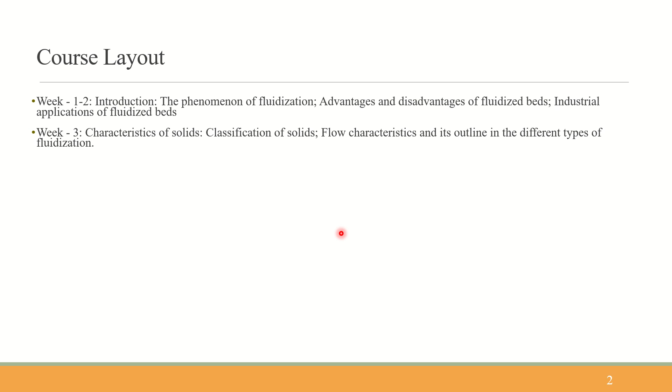Here we have week 1 to 2. In week 1 to 2, we'll be covering the introduction to fluidization phenomena, the advantages and disadvantages of fluidized beds, and industrial applications of fluidized beds. In week 3, it is about characteristics of solids, classification of solids, flow characteristics, and its outline in different types of fluidization. Weeks 4 to 5 cover flow patterns of fluidization systems and flow pattern transition.

Flow pattern transition, flow pattern map - because in fluidized beds the most important thing is solids, and we need to identify the characteristics of the solids. We need to know in which regime of fluidization it would be, and what properties that particular solid has, so it would be easy for us to analyze movement, mixing, and segregation. The classification of solids helps us analyze the situation happening inside the bed and understand what mechanism or type of things would be happening inside the fluidized bed, since mixing and segregation are all there.

In week 6, we would be studying gas distribution and different types of gas distributors. Week 7 would be bubbling fluidized beds. As we go along, you will see there are different types of fluidization regimes classified based on the inlet fluid velocity. Week 8 would be entrainment and elutriation from fluidized beds, week 9 is attrition mechanism, weeks 10 to 11 cover mass transfer phenomena including particle-to-gas mass transfer, and at the end we'll deal with heat transfer phenomena.

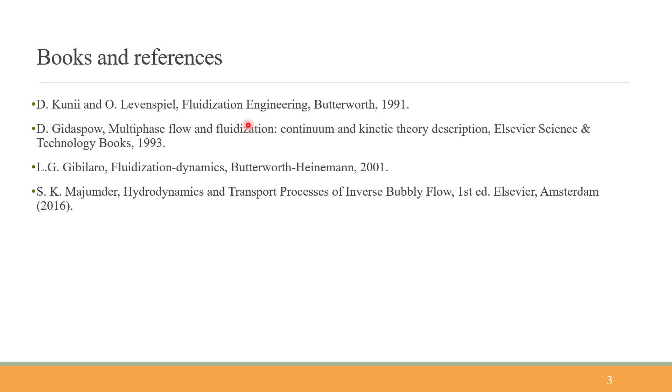Moving on, we'll go with this week's problem. But before that, I want you all to know what fluidized beds are. By now, you would have seen the lectures and be familiar with the concept. But can anyone explain what fluidized beds are? Even though you might already know, if anyone answers I would be happy. Maybe one person can answer. Okay, if not, I myself will explain.

Fluidized beds are nothing but a device, or equipment, wherein some means of separation or mechanical operation occurs. Not just mechanical, you can do unit operations and unit processes as well. So here we have a fluidized bed, which starts as a packed bed. By packed bed, we mean a column filled with particles. Consider we are passing air from the bottom of the bed, and the bed particles don't move at all. Can you imagine what I'm trying to say?

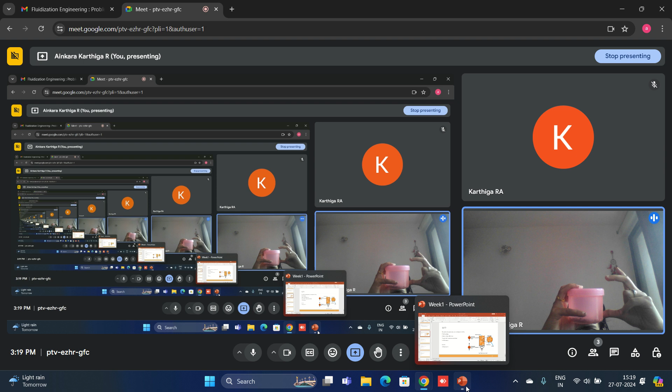And if the particles reach more height from this particular point, we are able to see that the surface area of the particles in contact with the fluid, which was less in the packed bed, has increased in the fluidized bed. So that's what we call fluidization.

And the advantages: we have increased surface area, and also the particles have started moving, so the mixing contact area has increased and mixing efficiency is increased, and so on. So we say that fluidization is an advantageous phenomenon.

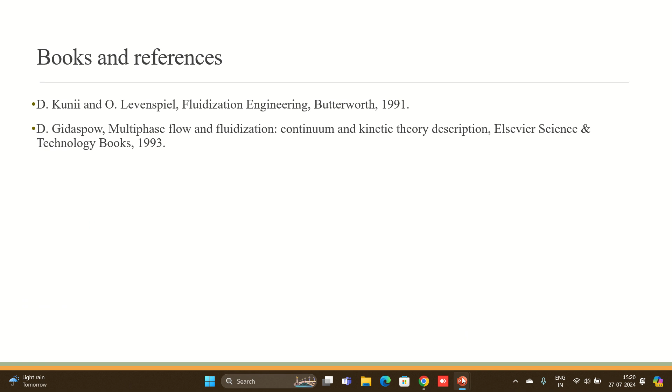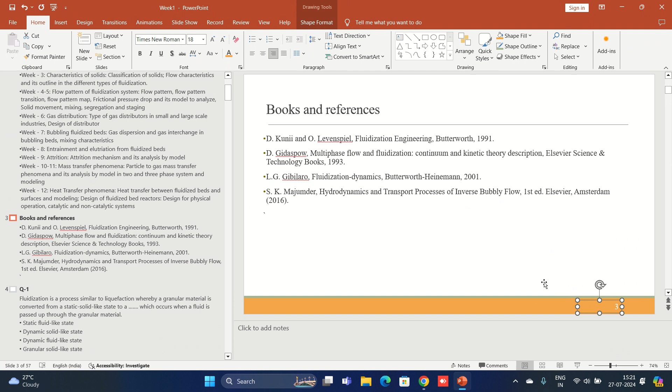So coming back, do we have no disadvantages when we are... I'm sorry, why isn't it going? Just a minute, my mouse has got hung. Okay, it is there somewhere. Why is it giving a big screen actually? Okay, whatever, we'll just deal with it.

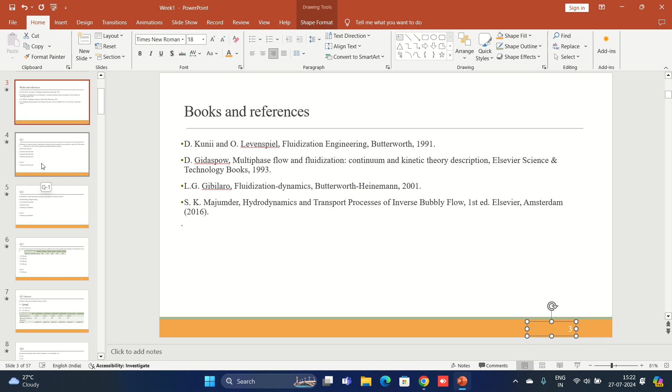Yeah, thank God. So what we were saying, it has an increased surface area, and also the mixing behavior is promoted, everything. So is that the advantage of fluidized beds? Sure, it is the advantage. But does it mean there is no disadvantage associated with fluidized beds? No, it doesn't mean that.

We have certain limitations when dealing with fluidized beds, like the particle, since it is moving at high speed, chances of particles escaping the column is high, and also the particles will rub against each other causing material loss. So there are certain disadvantages and certain advantages also. At the end, it always comes down to our requirement and how much we are able to compromise on certain things. That is what matters at the end of the day.

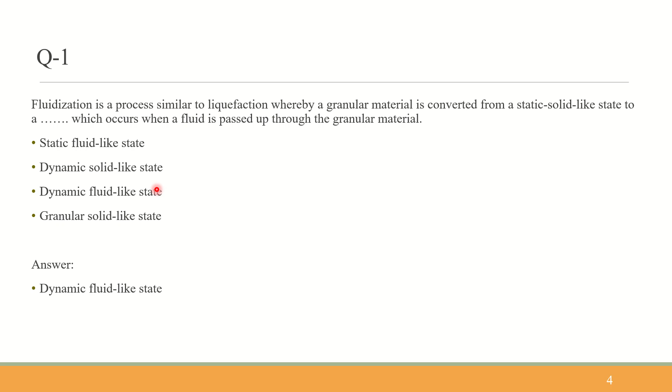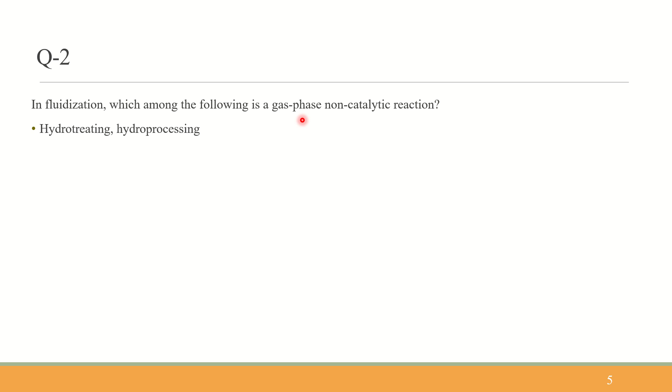Now we'll go on to question 2. In fluidization, which among the following is a gas phase non-catalytic reaction? We'll first look at the options and then come up with the answer. First option is hydrotreating, hydroprocessing. Second is acrylonitrile and aniline. Third is roasting of ores, and fourth is natural gas combustion.

These things you have actually seen in the lecture itself, so you are by now aware of the answers. What is the key thing to be noted here? We have two keywords in the question: the first is gas phase, and the second is non-catalytic reaction.

Acrylonitrile is a catalytic reaction, and hydrotreating/hydroprocessing also involves a catalyst. Roasting of ores is a gas-solid phase reaction because solid plays an important role there, whereas natural gas combustion is a gas phase reaction because the reactants and products of interest are in the gas phase. So the answer is natural gas combustion, option 4, the last option.

So question 2: in fluidization, which among the following is a gas phase non-catalytic reaction? And the answer is natural gas combustion.

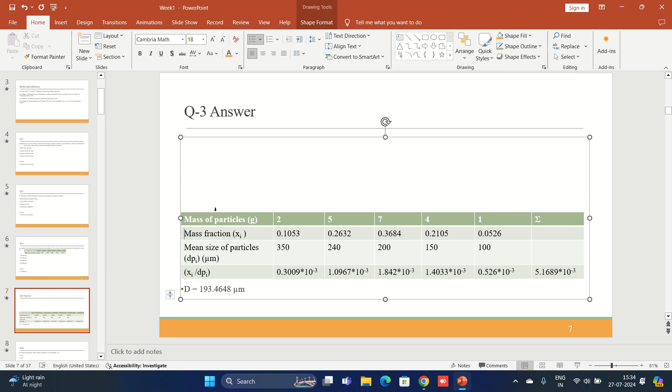So we'll follow the same thing here. We are given the mass of the particles and mean size of the particles. We are writing the given. So we have mass of the particles in grams, and we calculate the mass fraction of the particles. Total mass here is 19 grams, and mass fraction is the mass of particles in that particular size range divided by the total mass of particles. So it's 2 by 19, 5 by 19, 7 by 19, 4 by 19, 1 by 19.

And what are we doing then?

Yes, and then we are okay. Mentioning the mean size of the particles already given in the question, and then we are calculating xi by dpi. So mass fraction is xi, which we have calculated, and dpi is nothing but mean size of the particles.

So we are dividing 0.1053 by 350 and getting this, similarly 0.2632 divided by 240 we are getting this, and 0.3684 divided by 200 we are getting this, and 0.2105 divided by 150 we are getting this, 0.0526 divided by 100 we are getting this.

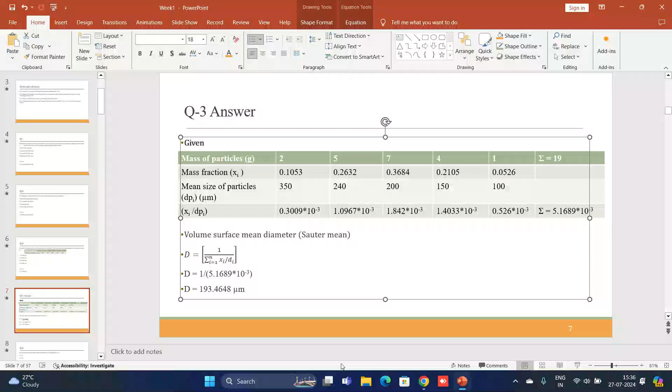We will see the question once again. So what is given in this question? Particle size analysis of the samples is given, and the following results are obtained. Volume surface mean diameter is in micrometer. So we have 25741 grams of particles with a corresponding particle size given in the next row, and we are asked to find the volume surface mean diameter.

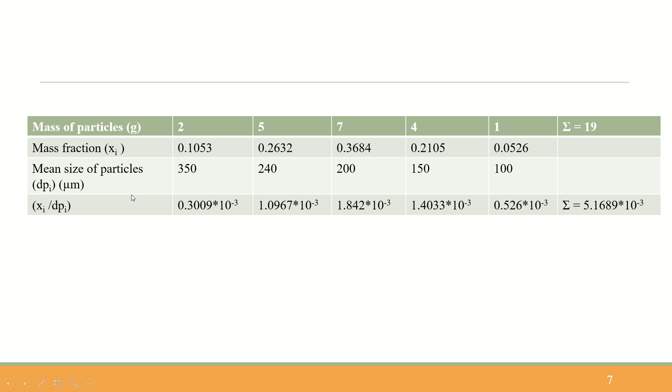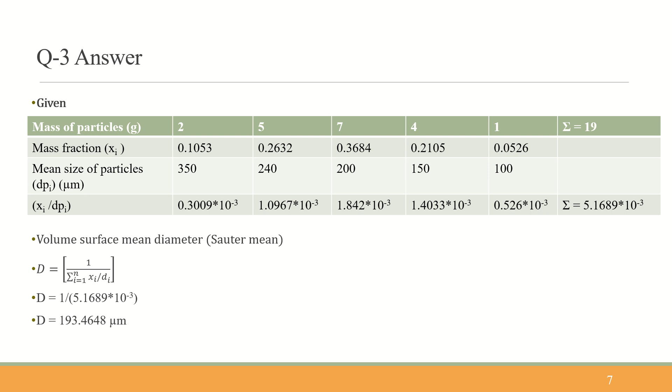For that we have calculated the mass fraction of the particles first, which how did we calculate? We calculated by dividing the mass of the particles in that particular size range by the total mass of the particles. So we have got the mass fraction, and we have then calculated xi by dpi, and summed up these values which comes around this. Then we have the volume surface mean diameter formula, d equals 1 by summation of xi by di, and d equals 1 by this value, and we are getting 193.4648 micrometer. So this is how we got the answer for this particular question.

And now I think it is clear, so we go on to question 4. In question 4, it is asked to calculate the sphericity of the cylinder of diameter 1 centimeter and height 3 centimeter. So what do we know about sphericity of the particles?

We all know that in whatever theory you study in class, you'll be dealing with spherical particles. For example, in fluidized beds, it is easier to study the phenomena of fluidization by considering the particle shape as spheres rather than non-spherical particles.

Why is it difficult to study non-spherical particles? Because imagine you have a sphere. How many parameters are required to describe the shape of the sphere? You require only one, that is radius. With radius as a parameter, you can get almost all the information of the particle. Surface area you can get, and volume of the particle you can get, and whatever you require you will be getting. You can describe the shape of the sphere using radii.

But when we say non-spherical, do we have a category of something like that? Here we are dealing with the non-spherical particle cylinder. A cylinder we can define using length and diameter. If it is a cube, we can say it using side length. If it is a cuboid, again we have 3 dimensions, and with that we can say. If it is a hemisphere, again we can say with radius as a parameter, but with different things. So each particle shape has its own set of parameters. There is no single parameter which defines all together, putting everything together.

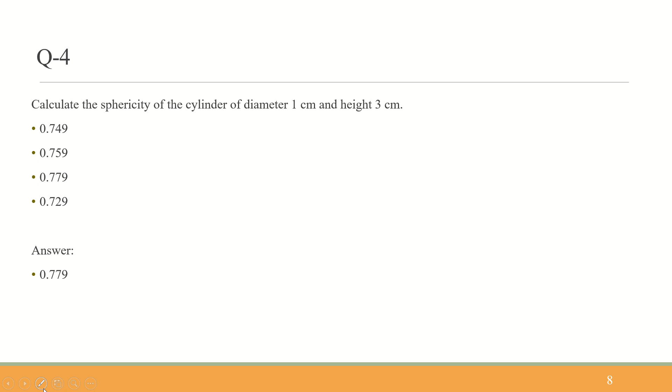For this reason we are now going to calculate the sphericity, and we'll see this step by step. As always, since this is a problem, we need to first write the given. The particle shape is given as a cylinder, and its diameter and height are given as 1 centimeter and 3 centimeters respectively. First we are calculating the volume of the cylinder.

First we need to know that sphericity is defined as the surface area of a sphere with the same equivalent volume, divided by the surface area of the actual particle. So for that, we need to calculate the surface area of the actual particle and the surface area of the sphere with the same equivalent volume, meaning we need to find the volume of this particle.

Volume of the actual particle, that is the cylinder, is equal to pi r square L, or pi by 4 d square L. Here we have d as 1, so 1 by 2 squared, and L is 3. So we are getting 2.355 centimeter cube.

And the surface area of the actual particle, that is the cylinder - what is the surface area of a cylinder? We have the outer perimeter as 2 pi R L, and both the top surface and the bottom surface give us pi r square. So it is 2 pi r square plus 2 pi R L.

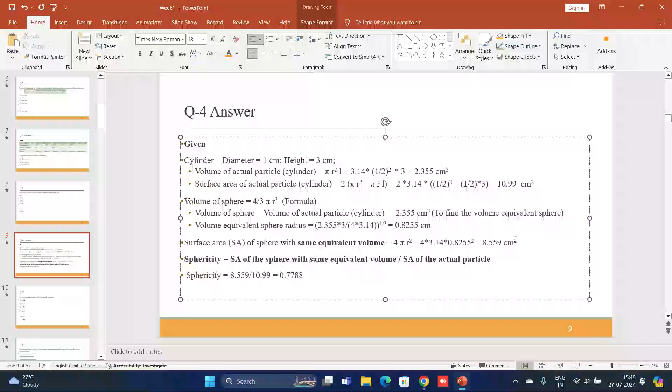Always remember that the surface area of the sphere would be the lowest, and surface area of the non-spherical particle would be higher than the spheres.

So surface area of sphere with same equivalent volume divided by surface area of the actual particle gives us 0.7788, so sphericity is 0.7788 or 0.779. So answer is option C, that is 0.779. I hope you are clear now.

First, what have we done? We have first calculated the surface area and the volume of the actual particle, that is cylinder, and on the basis of the assumption that volume of the newly constructed sphere is equal to the volume of the actual particle, that is cylinder, what would be the volume of the newly constructed sphere? So what would be the radius of the newly constructed sphere?

So we have back calculated the radius, and from this particular radius we have calculated the surface area of this newly constructed sphere. Sphericity is defined as the ratio of surface area of the newly constructed sphere with same equivalent volume divided by surface area of the actual particle. On doing the calculations, we get the sphericity value as 0.7788, and our required answer is 0.779. So that is the answer.

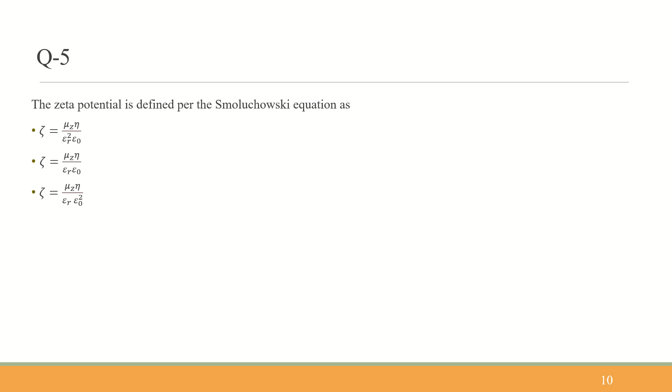Now we are moving on to question 5. In question 5 we have zeta potential. Zeta potential is defined per Smoluchowski equation as: option 1, zeta equals mu z eta divided by epsilon r square epsilon naught; option 2, zeta equals mu z eta divided by epsilon r epsilon naught; option 3, zeta equals mu z eta divided by epsilon r epsilon naught square; and option 4, zeta equals eta divided by epsilon r epsilon naught mu z.

So what is zeta potential, that we will see in the question in the coming up slides. Now we need to identify what is the zeta potential, the definition as per the Smoluchowski equation. So the answer is coming as option B, zeta equals mu z eta divided by epsilon r epsilon naught. That is the zeta potential. We will see more about zeta potential in the coming up slides.

Now we are going to question 6. In question 6 it is given that powder's tendency to gain or lose moisture at a constant temperature is important to understand the caking behavior signifies what? Option 1, transportable moisture limit. Option 2, dust extinction moisture. Option 3, moisture sorption or desorption. Option 4, saturation moisture content.

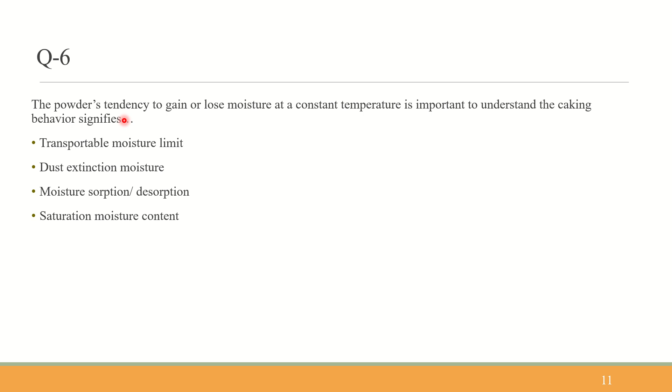So what does the powder's tendency to gain or lose moisture at a constant temperature signify, and why is it important to understand this? So, first one is transportable moisture limit, second is dust extinction moisture, third is moisture sorption or desorption, and fourth is saturation moisture content. We are going with option 3, because gaining or losing moisture at a constant temperature, important to understand the caking behavior, signifies moisture sorption or desorption.

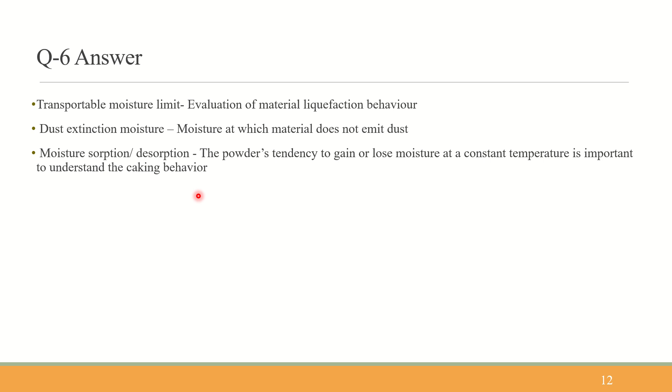We'll see why in the next slide. In question 6 it is given that transportable moisture limit signifies the evaluation of the liquefaction behavior of material, and dust extinction moisture is the moisture at which material does not emit dust. Third, moisture sorption or desorption: powder's tendency to gain or lose moisture at a constant temperature is important to understand the caking behavior, so this is our answer. The last one is saturation moisture content, which is the maximum moisture the material can withstand without it becoming slurry.

So we have learned four new terms today, which you would have already learned from the course. The first one is transportable moisture limit, which is nothing but evaluation of the liquefaction behavior of the particles or the material.

Second one is dust extinction moisture, which means the moisture at which material does not emit dust. Third one is moisture sorption or desorption, which is what is studied here - it means the powder's tendency to lose or gain moisture at a constant temperature. The last one is saturation moisture content, the maximum moisture material can withstand without becoming slurry. I hope these terms are self-explanatory. Our requirement is powder's tendency to gain or lose moisture at a constant temperature, which is moisture sorption or desorption.

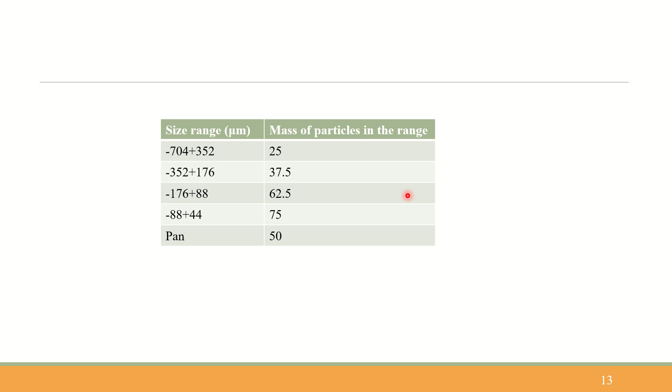Coming back, we have one more problem. We'll finish this and take a 5 minute break. Question 7: calculate the surface volume mean diameter for the following particulate material. We have size ranges: -704+352, -352+176, -176+88, -88+44, and pan. The mass of particles in each range is given: 25 grams, 37.5, 62.5, 75, 50. What is the surface volume mean diameter?

Options are 68.13, 78.15, 61.4, 38.16. Similar to the last problem, we need to identify what is asked and calculate. This is the same as the last problem, so take a minute and understand what is being asked before answering.

The answer is 61.4. Let's see how. First, we take the size range and mass of particles in that range, and calculate dpi, because particle mean diameter is not given directly, and mass fraction is also not given directly.

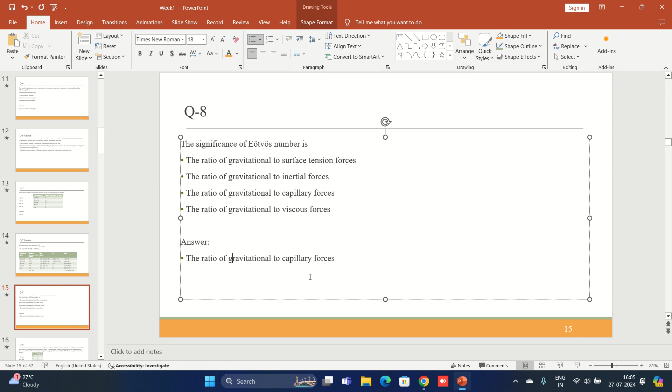Eotvos number has significance in that it relates the ratio of gravitational force to capillary forces. So the answer is option C.

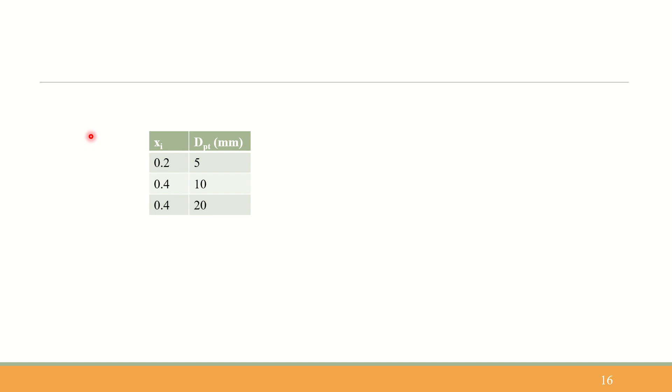Now another problem, similar to the ones we solved previously. The first thing is finding out the diameter. Question 9 asks: size analysis was carried out on a sample of gravel. The mass mean diameter of the sample, to the nearest integer, is ___ mm.

The mass mean diameter of the sample to the nearest integer is ___ mm. The data for mass fraction and average particle diameter of each fraction are given in the table below. So xi and dpi data are given, and we are asked to find the mass mean diameter of the sample. xi is 0.2 with dpi 5, 0.4 with 10, and 0.4 with 20. Here, instead of giving the mass, they have given directly the mass fraction, which makes our work easier. So first we need to identify what formula the mass mean diameter belongs to.

Until now we have solved for the volume surface mean diameter. Now we are asked to solve for the mass mean diameter of the sample. So the mass fraction is given and dpi is given: 0.2, 0.4, 0.4 for 5, 10, and 20 mm respectively. The mass mean diameter formula is nothing but summation of xi into dpi.

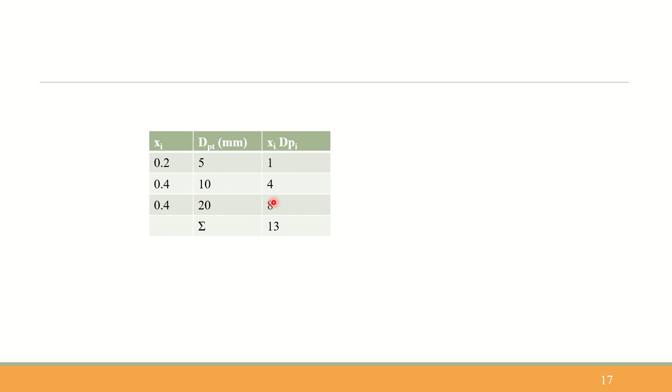So the mass mean diameter is given by summation of xi into di, and therefore D is 13 mm. It is a direct problem, so it is easier to solve.

Let us go on to question 10. Consider a cylinder of diameter D and length D, a sphere of diameter D, and a cube of side length D. Which of the following statements concerning the sphericity of the above objects is true? We are asked to compare the sphericity of a cylinder, a sphere, and a cube.

In the previous problem we identified the sphericity of a cylinder, and now we are asked to identify the sphericity of a cube and compare it with the sphericity of a sphere. The sphericity value of a sphere is always 1 - it is the thing to which we compare others. The formula for sphericity is the surface area of the volume-equivalent sphere to the surface area of the actual particle. In the case of spheres, both values are the same, so it becomes 1.

Let's look at the options first. The first option says sphericity of sphere is greater than cylinder and greater than cube. The second says sphere, cylinder, and cube all have the same sphericity. The third says sphere is less than cylinder is less than cube.

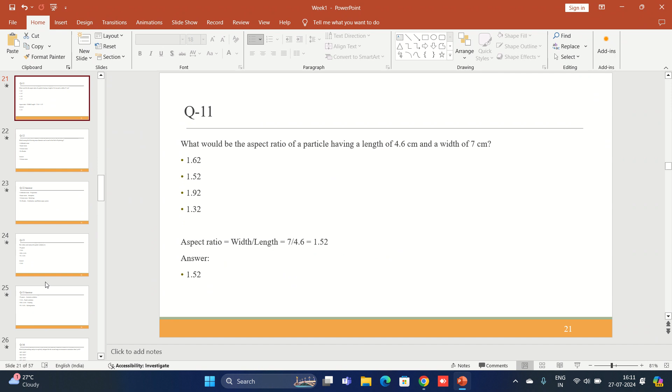Oh my god, we have a lot of questions to solve, guys. I don't know why I took these many questions. I thought there would be time, but I think we would be running out of time. But it's okay.

We are still, see, we have 57 slides and we are still in slide 19. Great work.

So, volume of cylinder is pi r square L. So here everything is D, so it is pi by 4 D square L and pi by 4 D cube. So volume of cylinder is pi by 4 D cube, and surface area of cylinder is again given by this formula, substituting R equal to D by 2 and L equal to D. So we get the surface area of cylinder as 3 pi by 2 d square.

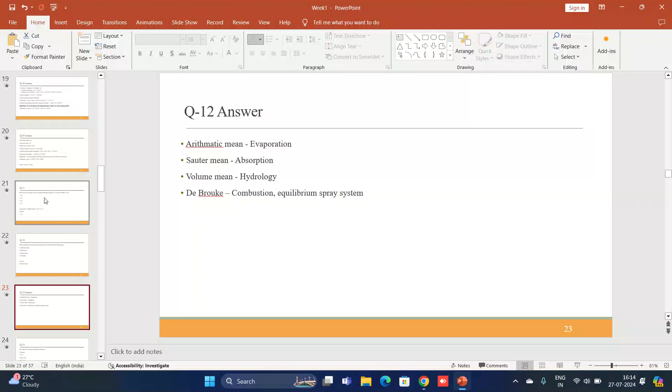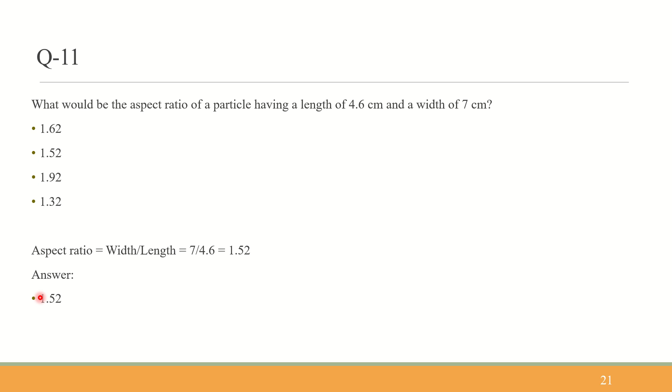Aspect ratio is one of the parameters used to define particle shape, and here it is defined as the ratio of width to length, mostly the largest dimension to the shortest dimension. Here it is 7 by 4.6 and it is 1.52. So answer is 1.52. Now we go on to question 12.

Question 12 asks which among the following mean diameters can be used in the field of hydrology? First is arithmetic mean, second is Sauter mean, third is volume mean, and fourth is De Brouke. The answer is volume mean, and we'll see which mean is used where. So the question is about which mean can be used in the field of hydrology, and the right answer is volume mean.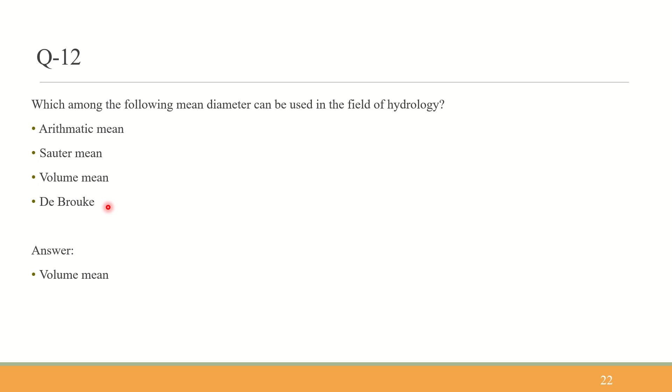So question 12, the answer is volume mean. Where do we use the other mean diameters? First is arithmetic mean, used in evaporation. Second is Sauter mean, used in absorption. Third is volume mean, used in the field of hydrology, which is what is asked in this question. So the right answer is volume mean.

Last one, De Brouke, it is used in combustion, equilibrium, spray system, etc. It's a theoretical question, again covered in the syllabus. I request you all to please keep an open eye on whatever is taught in the lecture by the professor, since these questions can come in your final exam also. Please be aware of that.

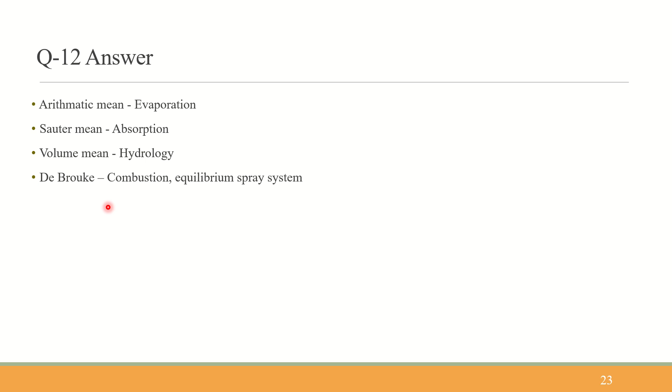And yes, question 13: it is widely used catalyst for partial oxidation - platinum gauze, V2O5, SiO2Al2O3, and NiAl2O3. Again, this is a theoretical question which is widely asked. So please don't skip the theory part in the lecture, be aware it might come in your final exam or assignments. So the right answer is V2O5.

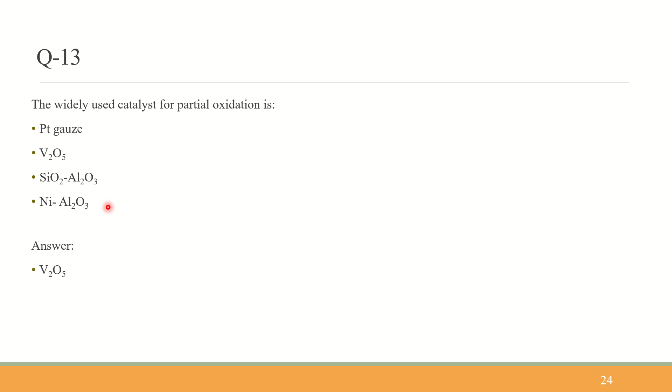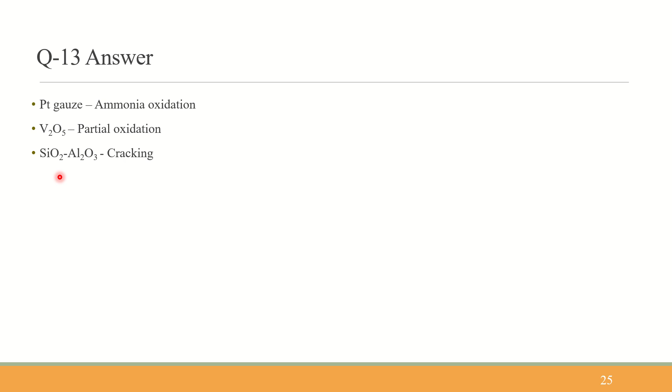So we'll see which one, V2O5, is used for partial oxidation as catalyst. But what about the rest? We'll see that as well. Platinum gauze is used in ammonia oxidation, and V2O5 is used in partial oxidation, which is what is asked in this question. SiO2Al2O3 is used in cracking, and NiAl2O3 is used in hydrogenation. So all these are being used in these applications.

That's it. Question 14 is again a theoretical question: which hydrocracking catalyst is explicitly designed for the second stage environment to maximize diesel yield? The coming up questions will mostly be theoretical questions, so I request you to keep an open mind and be attentive, because it might come in the exams and you need not revise again if you are listening now. These things are already taught in class, so it should just be a revision for you guys.

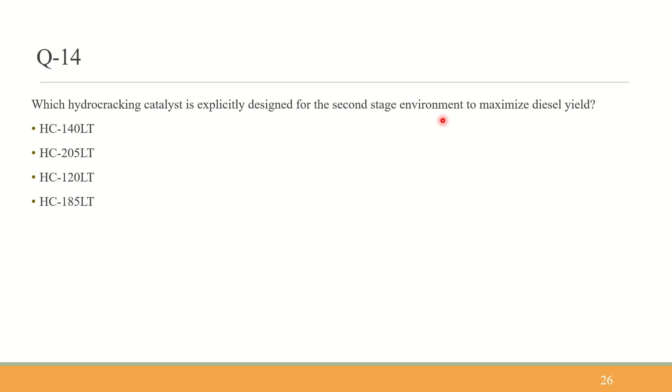The first option is HC140LT, second is HC205LT, third is HC120LT, and fourth is HC185LT. The question is about which is explicitly designed for the second stage environment to maximize diesel yield. HC205LT is the right answer - hydrocracking catalyst HC205LT, explicitly designed for second stage environment to maximize diesel yield.

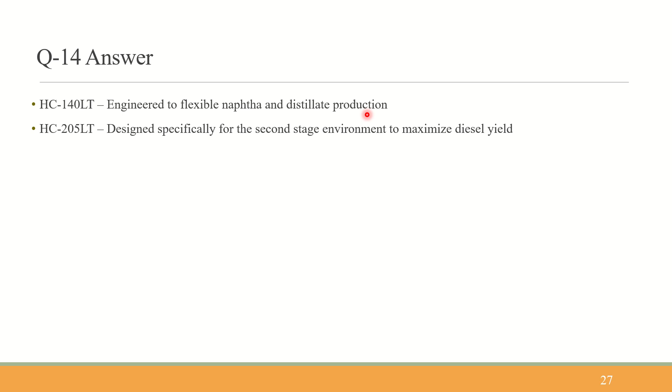So where are the rest of these items used? HC140LT is used in engineered flexible naphtha distillate production, and HC205LT is designed specifically for the second stage environment to maximize diesel yield, which is asked in this question. HC120LT is used for maximum total distillate production with improved cold flow properties, and HC185LT is a high activity catalyst with application for both naphtha and flexible diesel production.

I'm aware some of you might have difficulty memorizing certain things that don't involve more conceptual understanding. Like this question and previous ones, it's more theory and you need to keep certain things in mind. Even I have some difficulty associating and remembering these for a long period. What I saw recently is that you can associate certain things to a certain portion of your memory, and from there it's easy to recollect later. For example, if you see 140LT, you can associate it to something and remember it in a particular location in your brain. That way you can keep and remember everything. I saw this called a memory palace - I'm not sure if it works for everyone, but it helps you remember and build memory. It might be useful if you find it so. I saw this in a series, so I'm not sure whether it really works, but if it's useful, it's useful.

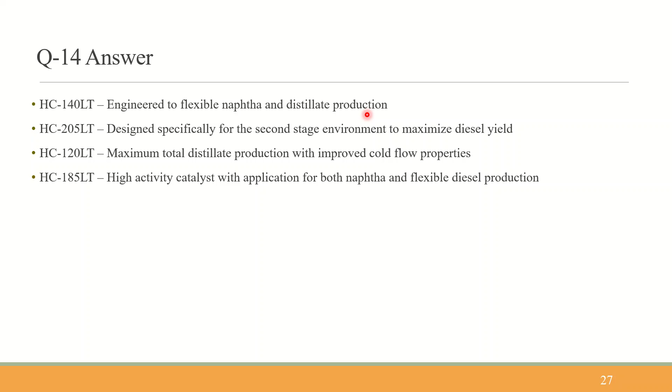Now we'll go on to question 15. The coming up questions will mostly be theory, so we'll see.

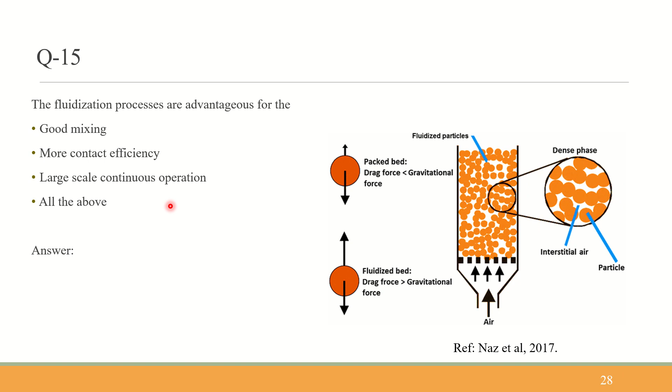Fluidization processes are advantageous for good mixing, more contact efficiency, and large scale continuous operation. So the answer is all the above, because fluidization provides good mixing and more contact efficiency, as the particles have moved from their original location, improving chances of contact with other particles and proximity with the fluid. Mixing is promoted because particles now behave like a dynamic fluid, and large scale continuous operation can be carried out with fluidized beds.

Now we'll go to question 16. Saturation moisture content is defined as either the maximum moisture material can retain without becoming slurry, moisture at which material does not emit dust, or the tendency of powder to gain or lose moisture at a constant temperature, which we saw in the previous question as moisture sorption or desorption. The fourth option is none of the above. The right answer is that saturation moisture content is the maximum moisture material can retain without it becoming a slurry.

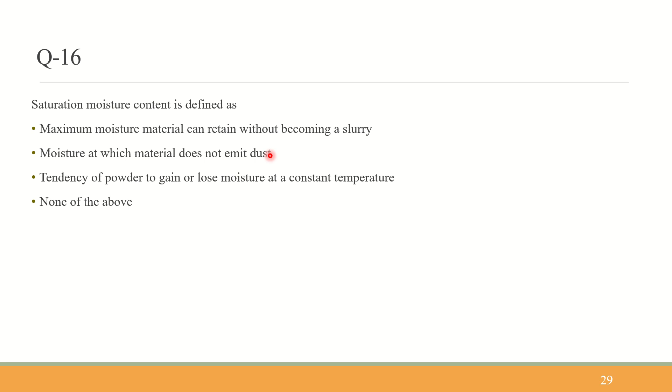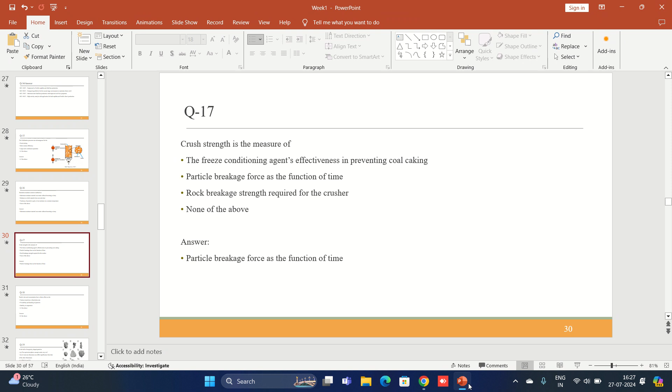Now question 17, crush strength is the measure of what. Why are we studying all these particle properties? The course is about fluidization, so isn't it sufficient to only study fluidization itself? Fluidization is about making solids behave like a fluid by passing fluid through them. We need to be aware of particle properties to carry out efficient operation, because if particles get broken with respect to time inside the bed, it would be difficult to get the actual requirement out of the fluidized bed, and post-cleaning would also be a task. So we need certain particle properties to better handle and manage these particles.

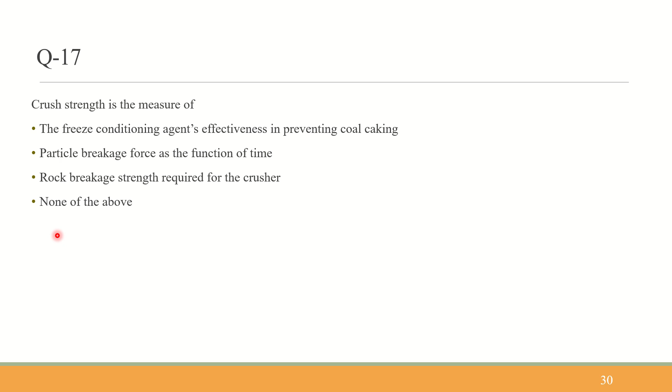The options are: freezing conditioning agent's effectiveness in preventing coal caking, particle breakage force as a function of time, rock breakage strength required for the crusher, or none of the above. As we've seen, the answer is particle breakage force as a function of time - that is what crush strength means.

Question 18 is about particle size and concentration having a direct effect on catalyst reactivity or dissolution rate, flowability and handling of granules, stability in suspension, or all the above. As we've seen, why do we need to study particle properties? Because they have certain advantages - size and concentration affects catalyst reactivity and dissolution rate, particle shape and size affects flowability and handling, and in suspension form, stability is also important, which we'll look at using zeta potential. For now, all the above is the right answer.

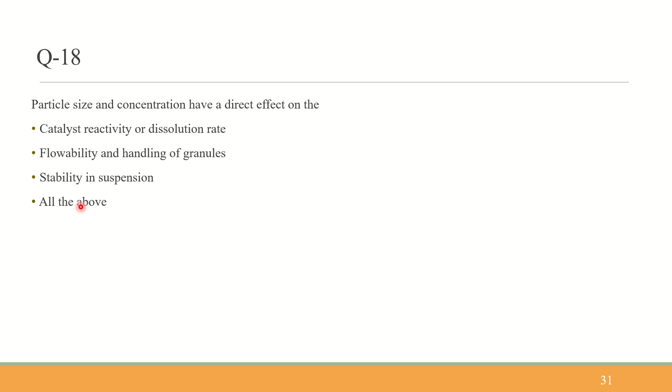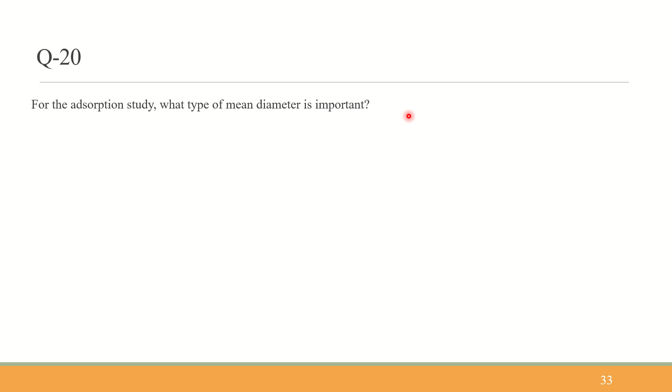The first option is surface mean diameter, second is volume mean diameter, third is arithmetic mean diameter, and fourth is all the above. So what is important for adsorption study? What comes directly to mind? Surface area comes directly to mind. So whenever we are dealing with adsorption study, we need to be conscious of the surface area, and therefore the surface mean diameter is important.

I hope you are clear till now. We have covered almost 20 questions, and 20 more questions are there. We'll rush it up now, because since these are theory questions, we can cover it in a short time. That is not an issue at all. So yeah, we'll now start.

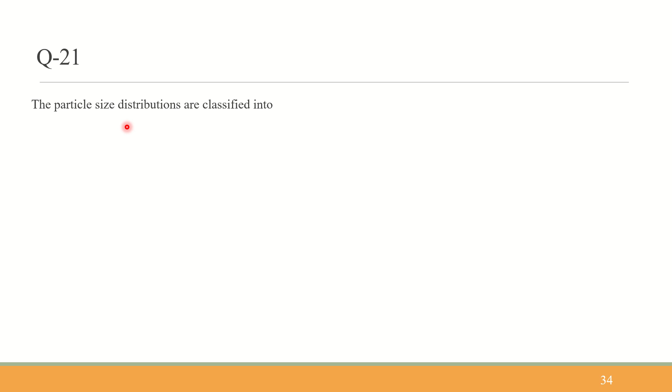Question 21. It is asked that particle size distributions are classified into: number and volume weighted distributions, volume and intensity weighted distributions, number and intensity weighted distributions, or all the above. So particle size distributions are where we classify the size of the particles.

As I've given the example before, there is a column of particles we are using in a fluidized bed, and the particles are coal or any other mineral. Can you say that the bed of particles has one particular diameter? No, we can't say that, because we cannot say that all particles will be uniformly sized. So we give some average distribution for those particles. That average distribution can be like: this particular mass is in this size range, or this number of particles is in this size range, or this volume of particles is in this size range. We can go with anything like that.

So with number and volume weighted distributions, we can say that this many number of particles are in this size range, and this much volume of particles is in this size range. Similarly, for volume and intensity weighted distributions, and number and intensity weighted distributions, we can go with all of these as well. So the right answer is all the above.

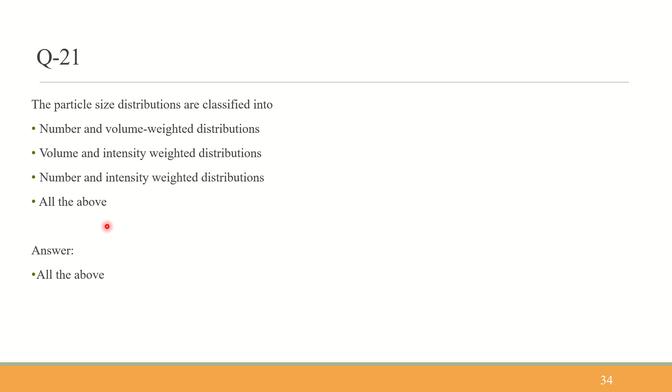I hope you are clear. Now we'll go on to question 22. In question 22, it is asked: for a spherical particle, the sphericity value is equal to 1, 0.5, 0.1, or 1.5. By now we are very familiar with this, that is, what is the definition of sphericity?

Can anyone say? I don't want you to say it now, but can you guess what sphericity is? I mean, not even guess - you already have a clear idea of what sphericity is. Sphericity is nothing but the ratio of the surface area of the sphere with the same equivalent volume as that of the particle, to the surface area of the particle. For spherical particles, both will be the same, and therefore its value is 1. Also, we have the comparison value of 1 for spheres to compare the sphericity of non-spherical particles. So sphericity of spherical particles is 1.

Keep that in mind. And question 23 - it should be 23, but anyways, fine. Circularity of a particle outline is defined as the ratio of... similar to sphericity, circularity is another two-dimensional concept.

Sphere, we are using a three-dimensional concept. Sphericity is a three-dimensional concept, circularity is a two-dimensional concept, because here we would not be requiring volume based information, you would be just requiring the surface area based information from the two-dimensional figure. So circularity is defined as the ratio of actual perimeter to the perimeter of an equivalent area circle.

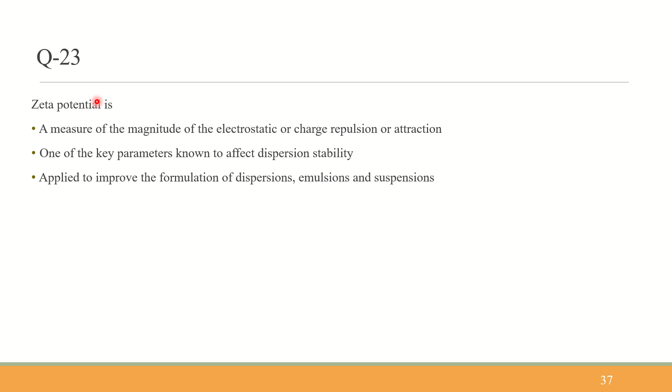Now we'll go to question 23. Zeta potential is a measure of the magnitude of electrostatic or charge repulsion or attraction, one of the key parameters known to affect dispersion stability, and applied to improve the formulation of dispersions, emulsions, suspensions - all the above.

As I've mentioned in the previous slides, zeta potential is an important concept. Why do we need to know the zeta potential? Because actually all the above is the right answer. I'll explain why everything is correct.

First, it is a measure of magnitude of electrostatic or charge repulsion or attraction. When we are putting particles inside some medium, we need to know whether they have electrostatic repulsion or attraction, whatever is happening, we need to know. So zeta potential measures that.

Second, it is a key parameter affecting dispersion stability. As I mentioned, when we put something in a solution, we need to know its stability. Third, it is applied to improve the formulation of dispersion, emulsion and suspensions. When we know the concept of stability of a suspension, we can use it in formulating dispersion, emulsion, suspension, whatever it is. So zeta potential is important because all three reasons are true.

The first is magnitude of electrostatic charge repulsion or attraction. One is a key parameter known to affect dispersion stability, and applied to improve the formulation of dispersion, emulsion, suspension - all the above. So all the above is the right answer.

Now we'll go to question 24. It is asked that a uniform particle size distribution of powder ensures: a non-uniform dissolution rate, non-uniform sedimentation rate, uniform dissolution rate, or none of the above.

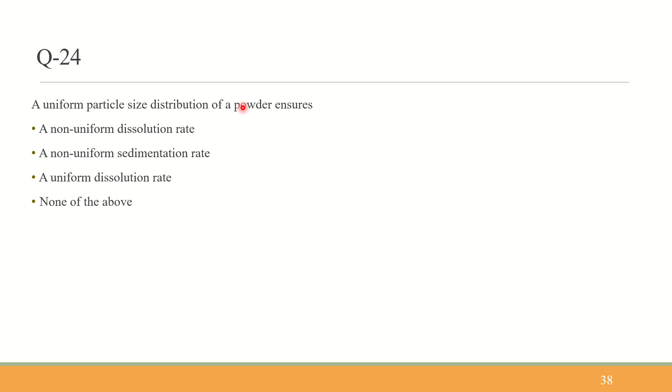We have discussed this question previously itself. Why do we need to have uniform particle size distribution? Because if we have uniform size, we can say that it has uniform dissolution rate. Uniform particle size distribution does not ensure non-uniform dissolution rate or non-uniform sedimentation rate. Rather, uniform particle size distribution has uniform dissolution rate. Option C is the right answer.

Uniform dissolution rate - these things I think you people would be aware of, or just a quick revision would be helping you get knowledge into it. So if anything, we can see.

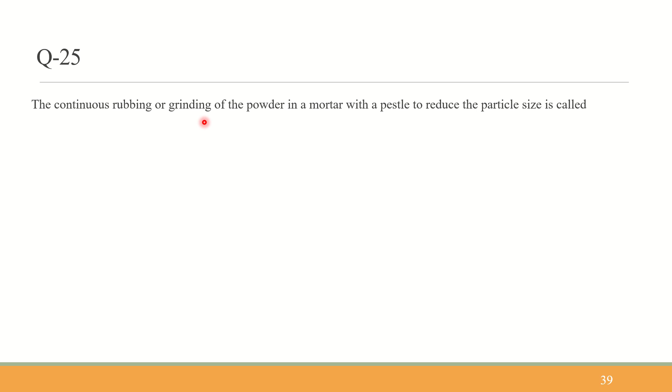Question 25. Continuous rubbing or grinding of the powder in a mortar with pestle to reduce the particle size is called: pulverization by intervention, trituration, levigation, or none of the above.

So here what is given? Rubbing or grinding of the powder in a mortar pestle, which reduces the particle size. What is this phenomenon called? It is called trituration actually.

So we'll see what other terms mean. Pulverization is a common term - comminution, crushing, grinding - wherein an external force is applied to a material to destroy it and reduce it into pieces smaller than the original size, like comminution, grinding, crushing, where we crush it using external things.

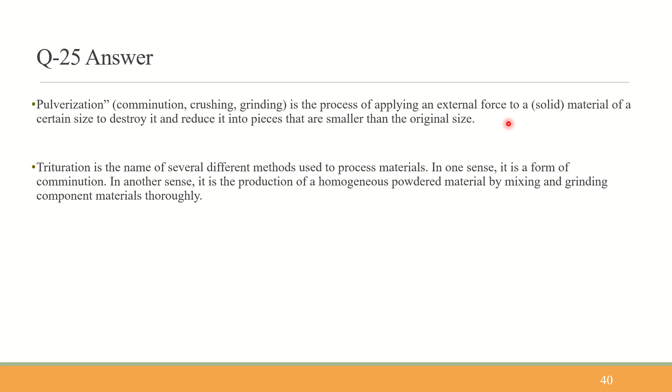Trituration is the name of several different methods used to process materials. It is a form of comminution. In another sense, it is the production of homogeneous powder material by mixing and grinding component materials thoroughly. In mortar and pestle, we are producing homogeneous powdered material - if we rub using mortar and pestle, the size distribution will be more or less uniform. Whereas in crushing and grinding, it would not be the case; we would have lots of large particles and lots of smaller particles too, so uniform mixing and uniform component production will not be there. So homogeneous material production is happening in trituration.

Levigation is the process of grinding an insoluble substance to a fine powder while wet. So if it is carried out using wet conditions, it is levigation.

So question 26, we will move on. In question 26 it is asked that according to Geldart classification, flour and cement are examples of which type of powder.

The second category is A - larger than C particles, and these are easy to fluidize. The third is B - larger than A particles, sand-like size particles, and these produce bubbles. The last one is D, which produces very huge bubbles and is very difficult to fluidize, because it is difficult to control the fluidization of Geldart D particles and spoutable particles.

So according to Geldart classification, flour and cement are examples of powder of which type - C, A, B or D? These flour and cement particles are very fine size, so they come under Geldart C classification. The options are type A, type B, type C and type D. The right answer is type C.

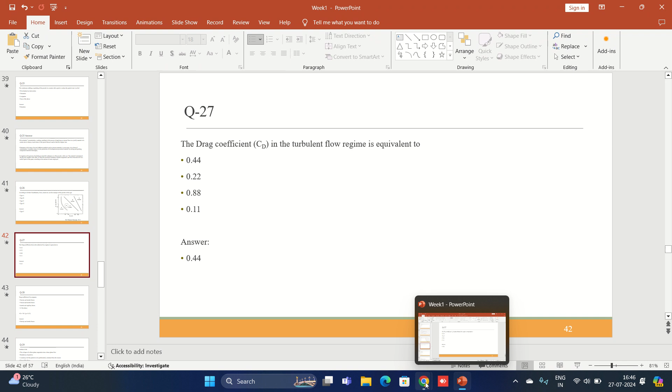So question 27 - we saw question 24, right, 26, yeah it is 26, and now we are going to 27. Question 27 is about drag coefficient in the turbulent flow regime equal to.

You might be aware that drag plays an important role. We have seen that when drag force is greater than gravitational force, it is known as fluidized beds. If it is less than gravitational force, we call it packed bed. What is drag force? It is the pull that is pulling the particles from the packed state because of the fluid acting on it, so that is important.

Based on Reynolds number, we have laminar region and turbulent region. So in laminar region, what would be the drag coefficient, and in turbulent region, what would it be? In laminar it would be 24 by Re, and in turbulent region it would be equivalent to 0.44. These things you would be studying after this also, so need not worry if you don't know the answer at this point. Options are 0.44, 0.22, 0.88, 0.11 - answer is 0.44, because in the turbulent regime the drag coefficient equals 0.44.

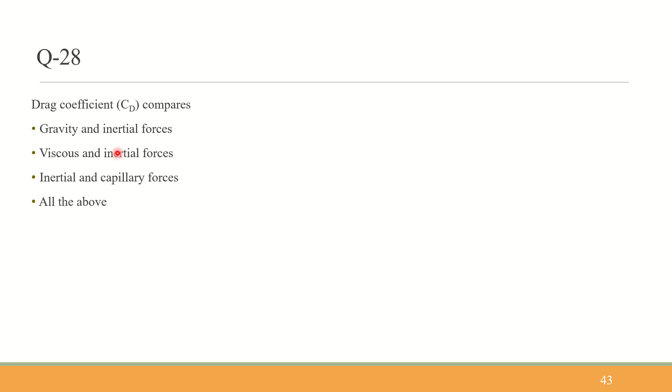Some things, if you don't know the formula, you can just think and compare based on the concepts, and you can answer the questions. So that is what I am saying.

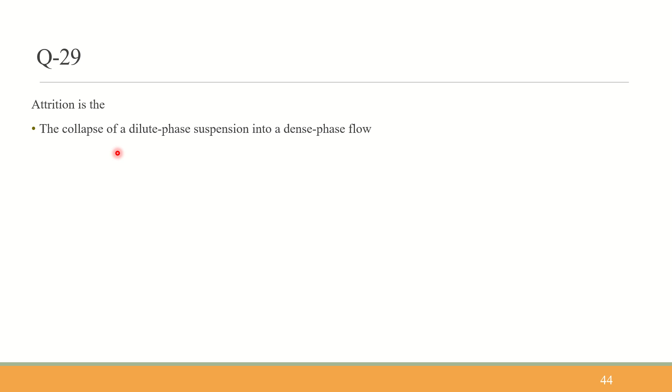Question 28 is this one. Question 29 asks about attrition. Attrition, as we all know, is the breaking up of particles. They have given a definition, so we'll go by that and identify the right answer. The options are: collapse of dilute phase suspension into a dense phase flow, breakdown of particles, tendency for fine particles to be preferentially entrained from the reactor, or none of the above.

Attrition is a breakdown of particles by some means, such as rubbing, and so on. So the first option, collapse of dilute phase suspension into dense phase flow, is false. The second option, breakdown of particles, is attrition. The third option, tendency for fine particles to be preferentially entrained from the reactor, refers to entrainment and elutriation, which is different - you will study these as the course progresses. The last option is none of the above. So the answer is breakdown of the particles.

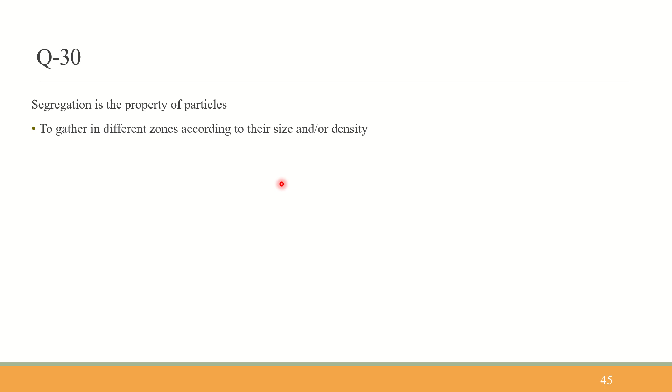Now question 30: segregation is the property of particles to gather in different zones according to their size and density, to be preferentially entrained from the reactor, to fall through gravity usually with co-current gas flow, or all of the above.

Segregation, as the name suggests, is some form of separation mechanism happening inside the system. Segregation is the property of particles to gather in different zones according to their size and density. So I am saying segregation is a separation mechanism based on their size or density, whatever this thing may be. It happens according to their size or density, and this statement is true.

The option 'to be preferentially entrained from the reactor' is not segregation - as I told before, there are two concepts, entrainment and elutriation, which come at a later stage of the course. And 'to fall through gravity usually with co-current gas flow' is again not true - that is some other name you will have gone through in the course. So the answer is: to gather in different zones according to their size and/or density. That is segregation.

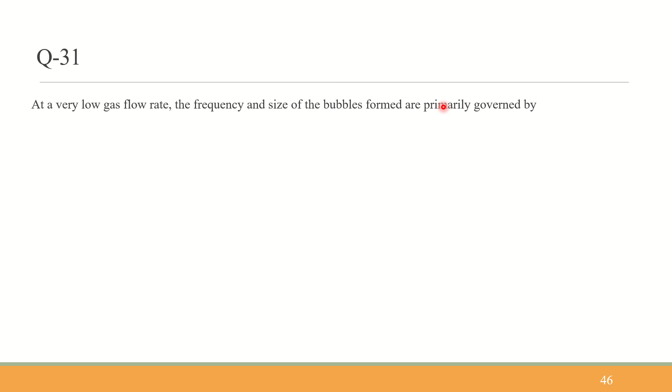Question 31: at a very low gas flow rate, frequency and size of the bubbles formed are primarily governed by what? Note the important keyword - very low gas flow rate. If at very low gas flow rate the bubbles still form, what affects the frequency and size of the bubbles formed? Options: surface tension of the liquid, buoyancy force of the bubble, both A and B, or none of the above.

So at a low gas flow rate, frequency and size of the bubbles are primarily governed by surface tension of the liquid as well as buoyancy force of the bubble - this is what is happening. So option A and B, both A and B, is the right answer. This happens at a very low gas flow rate, so you must be conscious of that. You will study these things in the later stage of the course - for now this is just an introduction. You just need to identify keywords like 'very low gas flow rate', and as the course progresses you will gain a deeper understanding.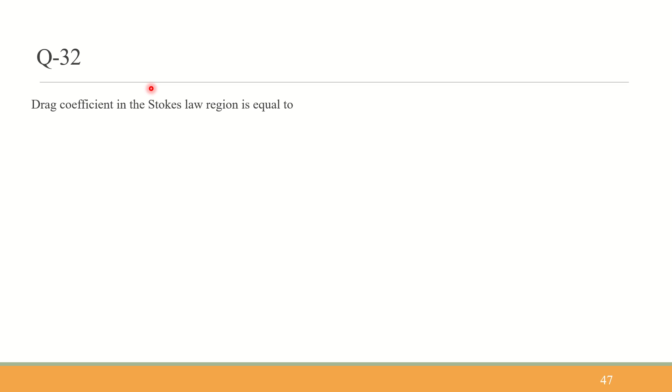Now question 32: what is the drag coefficient in the Stokes law region equal to? As I have said before, CD equals 24 by REP in the Stokes region, and in the turbulent region or Newton's regime it is 0.44 for spherical particles - you must be aware this is for spherical particles.

The options are: 48 by RE, 24 by RE, 64 by RE, and 16 by RE. Here RE is the particle Reynolds number, REP, equal to rho (density of fluid) into V into dP by mu - rho V dP by mu, where V is the velocity of the particle. So again, the drag coefficient in the Stokes law region is 24 by REP.

I hope it is clear. Now we'll go to question 33.

In 33 we have a spherical particle settling through a stagnant column of liquid. The terminal settling velocity of the particle is proportional to the diameter of the particle, proportional to the square of the diameter of the particle, proportional to the cube of the diameter of the particle, or none of the above.

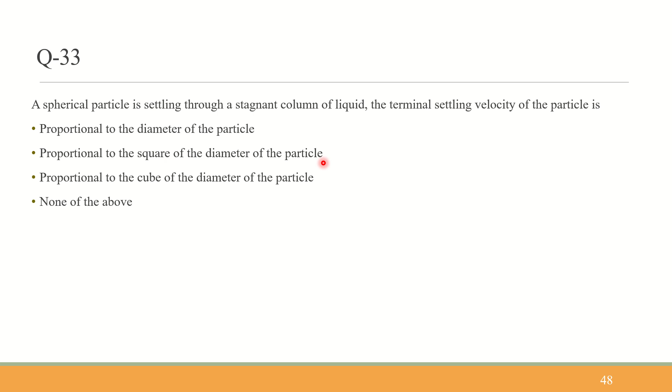At equilibrium, V is directly proportional to dP square into rho p minus rho f into g by 18 mu. That is the formula for terminal settling velocity. Terminal settling velocity equals rho p minus rho f into g into dP square by 18 mu. So it is proportional to the square of the diameter of the particle. Option B is the right answer, proportional to the square of the diameter of the particle.

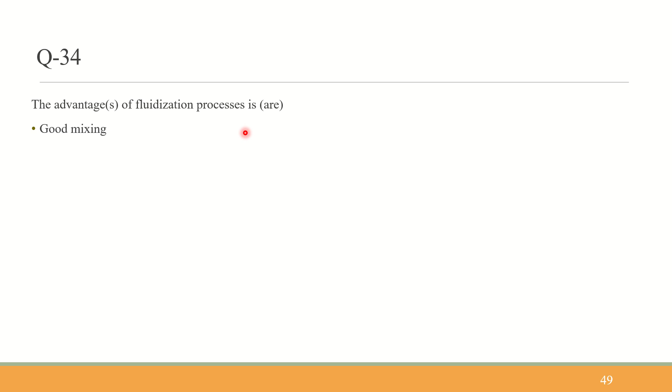Question 34. Advantages of fluidization processes: good mixing - yes, it is an advantage. Less contact efficiency - no, in a fluidized bed you have increased contact efficiency. Batch operation - no, you can use it in either batch or continuous, so it is not an issue. Or all the above.

So the right answer is good mixing alone. Advantage here is good mixing alone. The rest are not applicable for fluidization.

So we go to question 35. At the minimum fluidized condition, the pressure drop through any section of the bed is equal to what? We have seen that with low velocity, the packed bed remains a packed bed. But with increase in velocity, at one point, the bed weight equals the drag force acting on the particle, and this is known as the minimum fluidization condition.

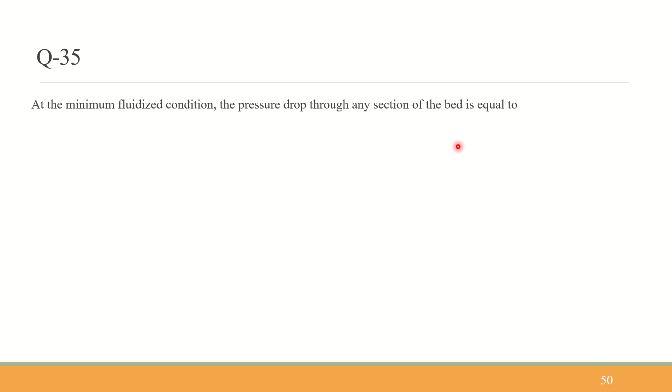After that, the bed starts behaving like a fluidized bed. So at minimum fluidized condition, the pressure drop through any section of the bed is equal to: weight of the particles, weight of the fluid in that section, weight of particles in that section, weight of fluid and particles in that section, or all the above. The right answer is the weight of the fluid and the particles in that section equals the pressure drop through any section of the bed.

At that point, the particles will be loosely packed, but they would not be moving, nor would they be a packed bed. Till minimum fluidized condition, the pressure drop would be increasing with respect to velocity. After the minimum fluidization condition, the pressure drop remains constant.

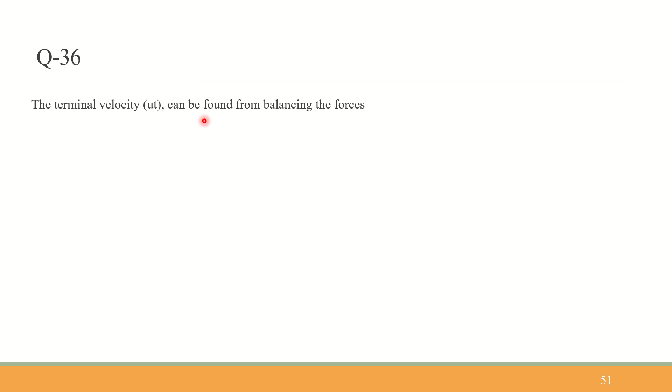Question 36. Terminal velocity ut can be found from balancing the forces: gravitational and inertial forces per unit volume of particle, gravitational buoyancy and drag force per unit volume of particle, gravitational and drag force per unit volume of particle, or none of the above. The answer is gravitational, buoyancy and drag force per unit volume of the particle.

Terminal velocity is when the particle's velocity has attained equilibrium. When the particle is settling, like when we put the particle inside the column and allow it to settle, what are all the forces acting on it? The particle experiences drag force, gravitational force, and buoyancy force. Balancing all these forces, we get the terminal settling velocity. So it should be balanced between gravitational force, buoyancy force and drag force.

Question 37: at the onset of fluidization, is the voidage larger than in a packed bed, smaller than in a packed bed, equivalent to that in a packed bed, or none of the above? As I mentioned, till the fluidized packed bed, the particle voidage is constant.

It would not increase however much we increase the velocity. At minimum fluidization condition, the voidage would be comparatively higher. After it has crossed minimum fluidization, that is in the fluidized bed regime, the voidage is always larger - the particles have expanded, so the bed height has increased. If the particle region has increased, the voidage, the region without particles, has also increased. So it is larger than in a packed bed. The answer is option A, larger than that in a packed bed.

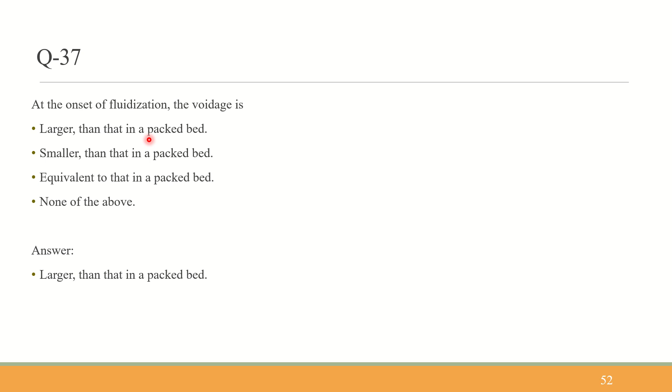How many questions do we have actually? Okay, yeah right, we have only 2 more questions and 2 more minutes. It doesn't matter, we can finish.

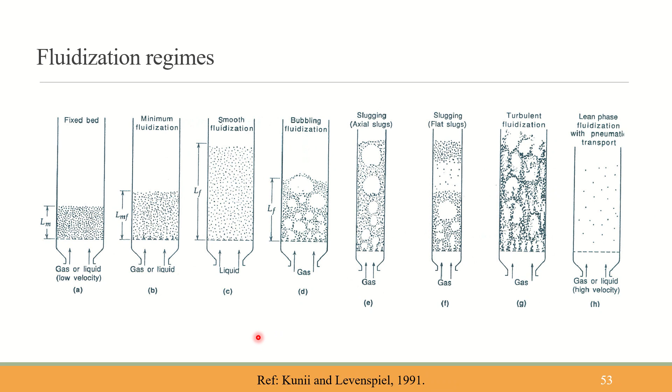Next is question 38. In case of bubbling fluidization, which we have seen with the formation of bubbles when passing higher gas velocity, what is observed? Bubble size increases as gas velocity increases, bubble size decreases as gas velocity increases, bubble size remains unchanged, or none of the above. We were able to observe that with increase in gas velocity, bubbles also were growing in size, so bubble size increases as gas velocity increases is the right answer.

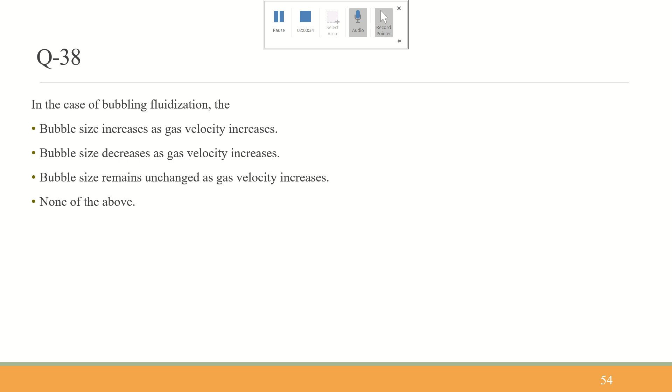So in case of bubbling fluidization, the bubble size increases as gas velocity increases. Option A is the right answer.

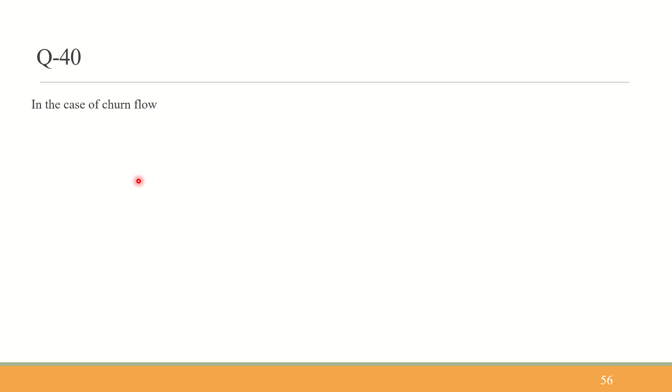Last question for today's class: in case of churn flow, that is in the bubbling regime, are spherical bubbles formed, distorted bubbles formed, bullet shaped slugs formed, or none of the above? We were able to see that in turbulent regimes, or before that we can call it churn flow, the bubbles were not uniformly shaped. They were not spherical, they were starting to get distorted. So distorted bubbles are formed is the right answer. Spherical bubbles start to get distorted, and we cannot say bullet shaped slugs, we cannot associate any shapes to it. So it is distorted bubbles are formed. Option B is the right answer.

Distorted bubbles are formed. So yeah, that's it for today's class.